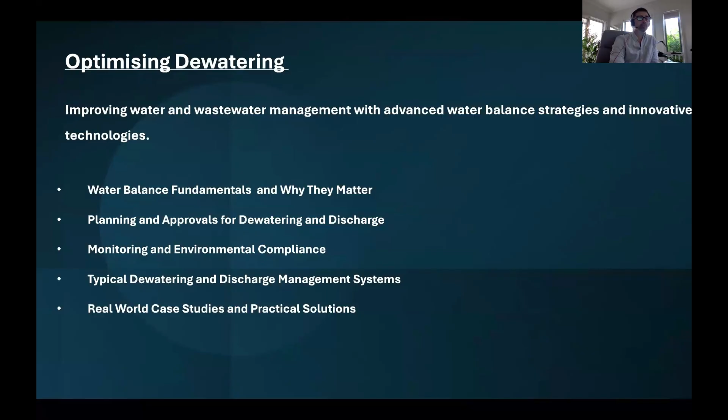So the concept of water balance has early roots, where major civilizations such as the Romans, Egyptians, Indus, and Chinese flourished by integrating water balance into their day-to-day lives. In each of these early civilizations, water balance management was essential for things like managing crops, providing drinking water, managing urban drainage, and mitigating flood risks.

Fast forward then a few thousand years to modern history, and things take a drastic change at the onset of the Industrial Revolution. At this time, there was a major gear shift in the demand for water as mass production required ever-increasing volumes for industries such as textile mills, iron and steel mills, steam power generation, and industrial-scale mining operations. To meet these escalating demands, engineers developed a wide range of invasive systems to store, transfer, and supply water, including high-capacity pump and pipe networks, extensive sewerage systems, and expansive reservoirs.

The shift from this limited-scale social use of water to consumption by mass production not only increased the stress on water resources, but resulted in widespread water pollution, which had profound impacts on aquatic ecosystems and human health. Rivers and streams that were once sources of drinking water and sustenance often became open sewers, with manufacturers discharging vast quantities of untreated waste directly into waterways where it mixed with equally copious amounts of raw public sewage.

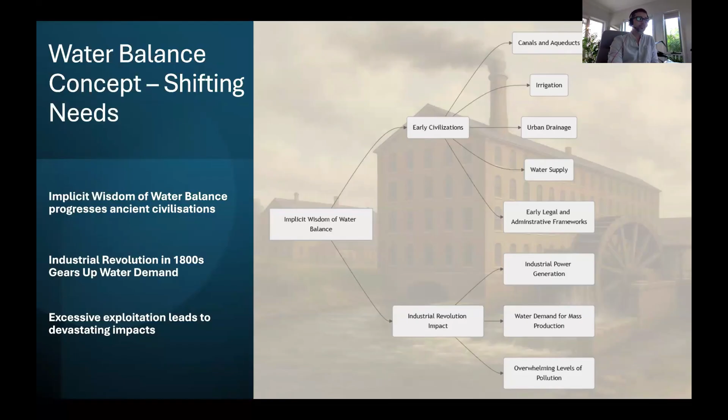By the 1980s, it was widely recognized in Australia that there was a need to protect water resources. The cumulative impacts of poor management practices, coupled with the harsh realities of Australia's variable climate, led to a series of economic and environmental crises. The crises forced a reassessment of how water was valued, managed, and allocated, which prompted a series of significant reforms aimed at recognizing environmentally and socially sustainable limits for water use and embracing the principles of water balance.

The Council of Australian Governments Water Reform Framework was a key turning point in how Australia managed its water resources. Some of the key principles enshrined in this reform were allocations of water to the environment, the establishment of water sharing agreements, and the separation of water property rights from land title. The COAG water reform also formally recognized the National Water Quality Management Strategy, or NWQMS, which today forms the basis for sustainable use of water, community values, water quality guidelines, and integrated planning for water resources.

It's important to note, although the reform was implemented at the national level, it was adopted by each state as a blueprint for a consistent approach to sustainable water management. Each state then drafted specific legislation and wielded the responsibility for sustainable management of their water resources through water access licenses, licensing take, and protecting water quality through pollution control and discharge licensing. In New South Wales, water sharing agreements and water access licenses are managed through the Water Management Act, and pollution control and discharge licensing are managed through the POEO Act.

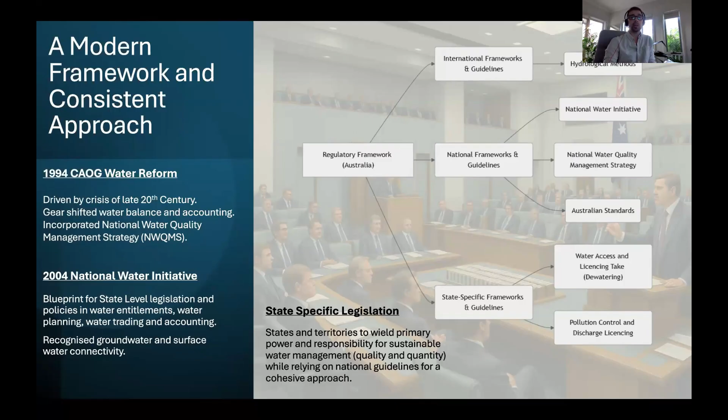So aside from important changes to legislation, there was further engineering and scientific effort needed to formalize methods for assessing, modeling, measuring, and monitoring water resources. Between 1965 and 1974, slightly preceding Australia's water reform, there was a global recognition and a formal effort to advance and standardize hydrological methods, which until then were varied and non-standard. Themes included recognizing the need for global data comparability, developing guidelines for measuring environmental parameters such as stream flow, groundwater, evaporation, rainfall, and water quality.

The IHD also saw widespread promotion of the concept of the hydrological cycle, which we'll all be familiar with from high school geography, and formal integration of the water balance equation into a range of hydrological methods. Now, since its integration and standardization, the water balance equation has formed the foundation of further advancements in water balance modeling into increasingly complex applications, where increasing numbers of complex variables must be accounted for.

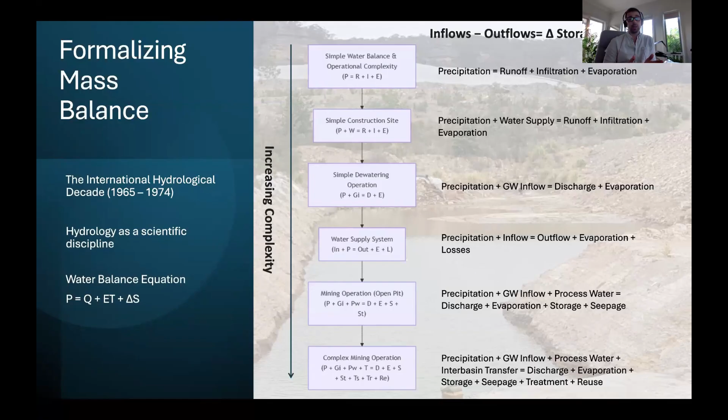So the starting point for any water balance is to prepare a conceptual model. This is, in essence, a simplified representation of a real-world system. At this stage, we're defining the system and its boundaries, the time period over which the water balance will be assessed. We're identifying the system components that relate to inflows, outflows, and storage, and describing the interactions between these components.

Once the components have been determined and compiled, the next step, typically adopted, is to prepare a visual representation in the form of a conceptual diagram. That might be a three-dimensional diagram, a cross-section, or it might even be a process flow diagram. For a mine site, this might be a diagram showing groundwater inflows, dewatering paths, discharge routes, storages, evaporation ponds. For a water treatment plant, this might comprise stormwater and groundwater inflows, wastewater inflows, storage, land application, and then discharge to the environment.

It's important at this stage, the conceptual stage, to identify any data gaps so that they can be addressed if needed through further investigations and data collection. For example, determining groundwater inflow rates might require some seepage monitoring or permeability testing of aquifers. For discharges, it might be necessary to collect further information on flow conditions and water quality in the receiving waterway. A lack of information in this regard can cause propagation of error down the line where you end up with the wrong results.

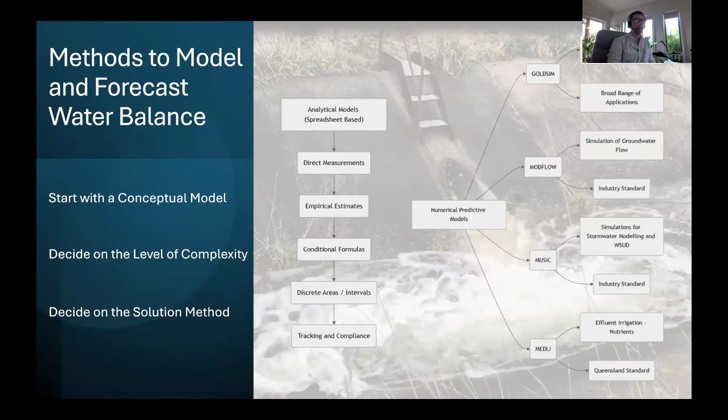It's typically up to professional discretion, but that being said, when it comes to the approvals pathway, the regulators will have a definition on what they require to gain approvals. So for mine sites, if you were to come in and say we built a GoldSim model, the regulator might turn around and say it's insufficient for X number of reasons, so we'd want you to go with the MODFLOW model. There are guidelines out there at the national level and some at state level on the methods to be adopted for groundwater modeling, and especially for groundwater models, there's the Australian guidelines on groundwater modeling. So that's what I'd refer to when considering your modeling approach, at least with MODFLOW. Okay, thanks for that.

Awesome. So there's an important adage in the field of hydrological modeling, which states that if you put garbage in, then you get garbage out. That's to say, if your model is based on inaccurate or incomplete data, you may find the outcome doesn't represent reality, and you're going to have to go back to the start when you realize that. So in order to build a reliable model, we must have reliable data on the necessary inputs for a water balance analysis. The first place to start on your journey is to gather data at your computer. So don't go charging out into the field. Compile the data you already have and what's available and reliable from the public domain.

The most common variables that I see for dewatering and discharge projects are climate data such as rainfall, evaporation and evapotranspiration, groundwater levels, aquifer hydraulic properties, stream flow data, water quality data, and your pumping rates. For more complex dewatering projects, you may require information on things like your process water demands, your water reuse volumes, your different surface land uses for land application schemes. Say, for example, you want to go and irrigate a field. What is the soil over there? What is the crop type? What are its crop efficiency and evapotranspiration rates? And does the soil have enough permeability for you to safely irrigate that area? Regardless of what you need, the place to start is at your desk. Build the conceptual model.

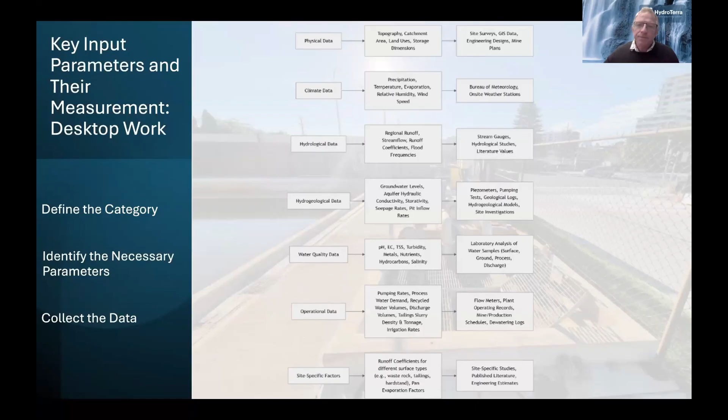Okay. Yeah. So once you've gathered your desktop data and you've built the foundation of your conceptual model, it might be time to start collecting the field data and fill in the critical data gaps that you found from your desktop study. And that might be only a few things. It might be a lot of things. In any case, you really need to understand what your data gaps are before you go out in the field.

Like the desktop data, you want to make sure that you're collecting and compiling information that's relevant to your specific application. So don't go out and test for everything. Go and target those objectives to what it is you're doing. You wouldn't, for example, go and collect field data on soil permeability if you weren't intending some sort of land application for managing water. Once you have a clear idea of what you need to collect, it's time to go and plan out a suitable strategy for collecting that data.

And there's a wide range of both standard and innovative methods which you can adopt when collecting field data relevant to water balance and dewatering discharge assessments. The method you adopt will depend on a combination of site-specific factors and the quality and type of information that you need. For example, you may want to determine the variability of flow in an ephemeral creek and the corresponding water quality during a rainfall flow event.

In this instance, standard methods might include the use of a weir coupled with a water level sensor and a rising stage sampler, or an automated water quality sonde. Some of the newer methods might include image-based velocimetry, or microwave Dopplers coupled with nutrient electrochemical sensors or passive samplers. Whatever you do, whenever collecting your field data, it's important to consistently consider the objectives and whether or not your field data collection is of sufficient quality and quantity to address those objectives.

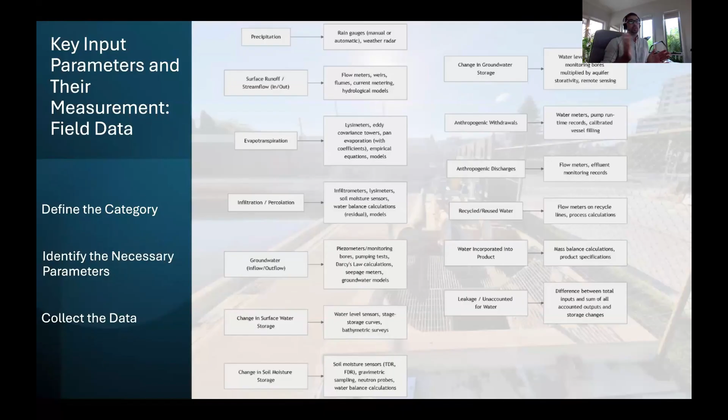Once you've got several of those examples of different unit hydrographs for different magnitude of flow events, and you've coupled it with your water quality, you can get a better idea of the natural flow variability before you commence a project. But it's a cost, and it's a highly technical thing. So I would say that is something that, when it's done right, it can really help you out. But few times it's done to that level of detail that's needed.

We often get involved monitoring groundwater surface water interaction projects. It's a tricky area to predict, isn't it? So just sort of, is that something that you look at on every project? Is that part of your conceptual model, or?

So the variability or the unpredictability, is that right? That's right. So I don't know, say it's the Yarra River in Melbourne and its connection to the CityLink tunnel during its early phase of work. Is that something that you would expect to need to do? Yep, logically absolutely. It's part of the uncertainty analysis, and it's part of that uncertainty assessment. And the best we can do with that is come up with statistical derivations to give best fits on what we expect average and reasonable worst case conditions or best case conditions might be.

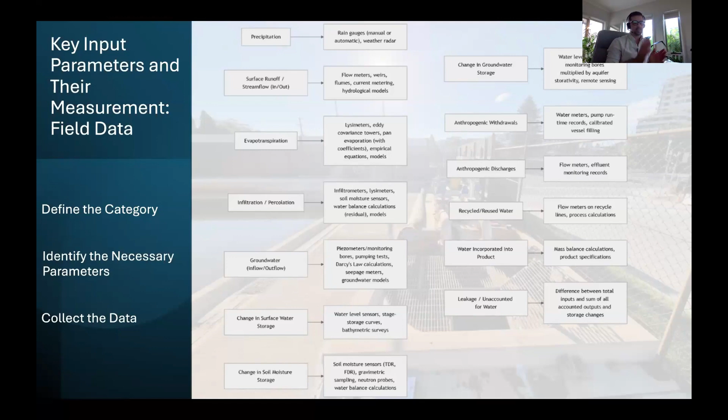So we take a sample and we say, this is our sample. We'll run the statistics on that and hope that it's representative of the population. So that's the best we can do. We're always getting snippets of information in environmental monitoring. It's very rare that we have comprehensive continuous data that's reliable and can be used universally. And part of that is, I think, it comes at a cumulative level where a project starts and ends and they collect data for a short period of time and then it just disappears into the ether.

My personal view, and I think a lot of people hold this view, is that if all that data that people are out capturing and collecting on these systems was collected and centralized into an open source area, I think there'd be a lot of benefits and a lot of advancements in environmental management. But unfortunately, a lot of that is locked behind private and confidential or locked doors. Yeah, and I think it always will be. I don't think it's ever going to change. I don't think it can change, unfortunately, but you can always dream.

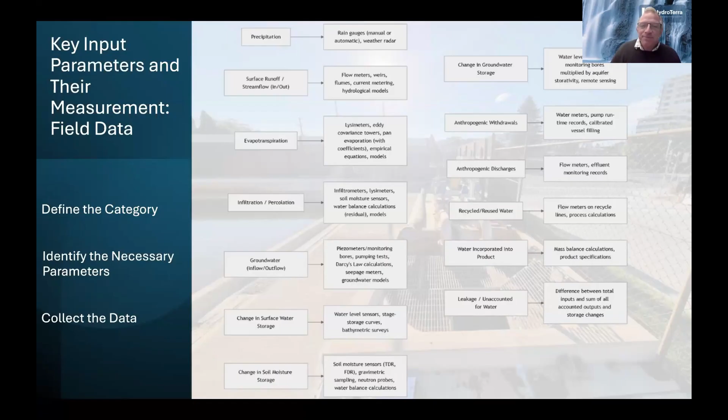Yeah. Let's move to the next one. Grant, so now we've talked a bit about the technical. It's time to talk a bit more about non-technical, but that is planning, approvals, and compliance. And it's important to note here that not all projects will follow the same process or require the same level of detail. Small-scale, low-impact projects may only require a few of these steps, whereas a large-scale project may require all of them to a great deal of detail. What I'll talk about here is what can be expected for some of the larger projects, and to give you an idea of broad considerations in the approach for planning, approvals, and compliance process.

To start with, it's important to consider the application of the water balance, as I've discussed already. It's often not a one-time exercise, but rather an evolving process and a tool that will provide critical insights through the entire life cycle of a project, from its initial conception through to the end of its operation. For dewatering discharge projects, the process typically starts with identifying the need for discharge, conducting initial site investigations, characterizations, and risk assessments, which are then fed into a water management plan. This might be a single plan or a master plan with a series of sub-plans governing the sources, transfers, storages, uses, and discharge of water.

The impact assessments and the management plans are then submitted to a regulatory authority and stakeholders to obtain approvals and licensing necessary for the project to progress. So for a dewatering project, it may be necessary to obtain water access licenses and works approvals to take the water. Or for stressed catchments, there may be a need to acquire water access through trading markets to effectively buy an allocation from another access license holder, as none are currently available and the system is over capacity. To then discharge that water, it might be necessary to engage further with a different regulatory authority and stakeholders again to obtain a permit to discharge or a discharge license.

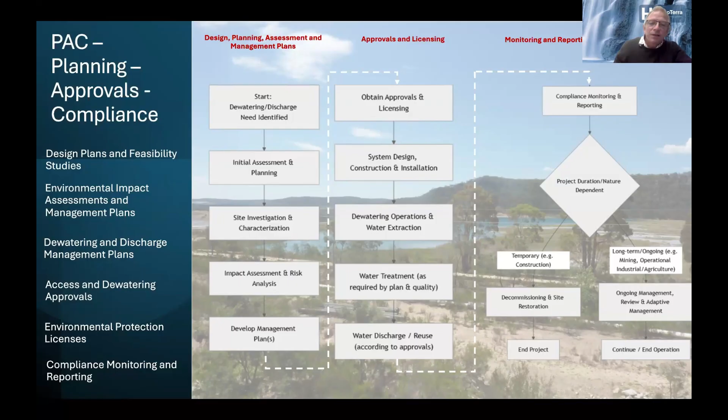So looking at management plans in further detail, there are a few common documents or components that we would consider in a dewatering and discharge scheme. The first and most obvious is deciding on your dewatering method and design, which I'll talk to a little bit later on. You may decide, for example, that a sump pump is sufficient for the base of an excavation because the footprint or the depth is quite small and the formation is relatively well consolidated, so there's no risk of

it slumping in. For larger projects or high permeability units, it might be more beneficial for you to dewater the local extent prior to and during excavation using abstraction dewatering bores, or adopt an exclusionary method such as a cut-off wall or a cofferdam. Once you've decided on your approach, you can actually start working on the other components, including deciding on your monitoring program, your surface and groundwater investigations and monitoring, and a discharge and reuse plan and a water treatment strategy, because you'll have a better handle on how you're actually going to manage the water. And then these can all be integrated into an overarching environmental management plan, or more often than not, a sub-plan, which is your water management plan.

From your experience, like we had Greg Hoxley on the other day, did a webinar, and he mentioned that the level of rigor required for the groundwater side of things before getting approvals is going up. Does that concur with yourself? You're finding they're needing more and more rigor, or? Oh my God, they've always needed a great deal of rigor. And I would say they're getting more scrutiny now than anything else. I've seen it a lot with licensing of discharges, and I've also seen it with taking of water for dewatering.

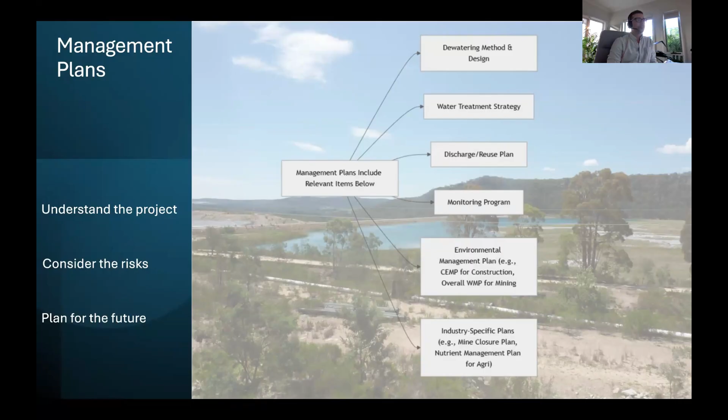Part of that is born out of the evolving guidelines and understanding of groundwater systems, and part of that has arisen out of learning from mistakes made or bad practices. Identifying the need for stricter rules around the approach, and even just consistency around the approach. One of the most infuriating things as a consultant is when there's a lack of a guideline and people are doing all sorts of things in different ways that can cause risk. Makes sense.

So moving on from management plans and onto the fun world of approval and licensing. Once you've got a draft of your environmental management plan, it's time to submit that to the regulatory authorities and ideally cross your fingers and hope you've done all your homework, because they will know if you haven't. They'll review your documentation, check if it's all in order, and provide you with the relevant permits to proceed. And it's not always a matter of once and done with this process. You may find out that they've got some hang-ups that you need to address, and you have to go back to the drawing board with your water management strategy.

For access and take, your water management catchment, for example, might not have sufficient available volume for you to extract water, and you might have to consider something like a managed aquifer recharge scheme or a closed loop system for your dewatering project so as to not impact on that aquifer. Or you might have to go to market and buy some allocations and hope that there are enough available for your scheme to go ahead. For discharges to receiving waterways, you might find that the EPA are not comfortable with the level of risk to the environment caused by the release of your water.

And you may need to further explore your water management options, such as irrigation schemes, transferring that water to other users who could use that water, even at its level of quality, or a trade waste agreement for discharge to sewer. And it's important to note here, for discharges to sewer especially, that many of the public water treatment plants in Australia are either at or over capacity under their normal operating conditions, especially so in the regions. So discharges to sewer generally have limited success unless the volume is very low. And even then, there are water quality limits around discharge to sewer, which you might not be able to achieve for your site.

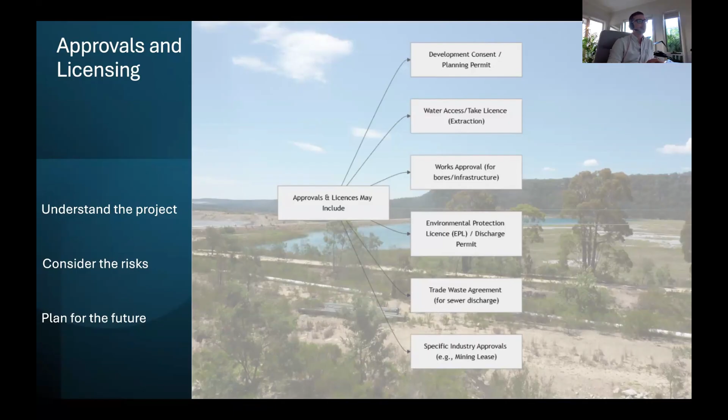So once you've got your permit, fingers crossed, and everything's kind of going your way, you'll need to expand on your environmental monitoring program. It's often a condition of these licenses that you have a robust monitoring program in place, and then you continue to monitor. You might be required to monitor and report, for example, on your abstraction rates for compliance with the water access license.

You might be required to monitor and report on water levels and drawdown, not only to assess potential impacts to aquifers under the aquifer interference policy in New South Wales, but for potential risks from subsidence, which is a particular concern for dewatering projects in urban areas where subsidence could cause major issues to the foundations of buildings and linear infrastructure.

So water quality monitoring at your licensed discharge point will be used to inform the EPA on your compliance with your discharge limits, and they may choose to set a volume limit to balance your potential risk to the environment, which would require you as well to conduct flow monitoring.

It's important that your monitoring methods are undertaken in accordance with the approved methods, not something you've made up yourself, as a failure to do so could result in a non-compliance and penalties, and the penalties are often quite steep. You could be looking at $60,000 for something you could have invested in and maybe spent $5,000. So if you skimp, you can sometimes get punished for it.

Typically, I would say you're required to adopt at least the Australian standards, but state level guidelines and standards might also be required. For example, the New South Wales EPA have their own approved methods for the sampling and analysis of water pollutants in New South Wales.

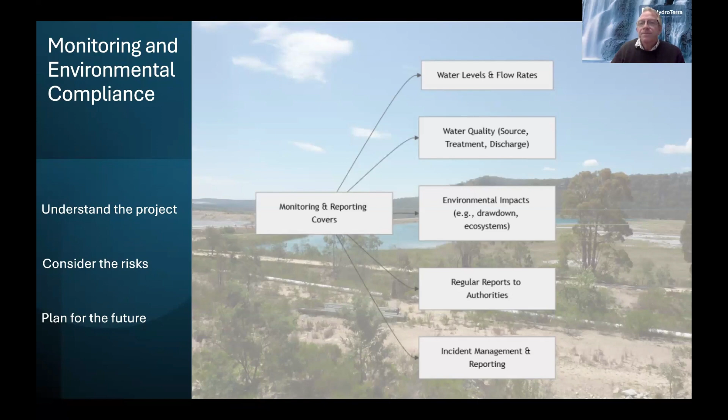All right, shall I move to the next slide? Awesome. So now we've rounded off our discussion on planning and approvals and compliance. We'll take a shallow dive into dewatering and wastewater management techniques.

It's important to note that any effective dewatering and discharge management system is a combination of both critical engineering decisions and critical management decisions, which need to be drawn out through collaborative discussions between management and engineering. In my experience, systems will often fail to meet their objectives when there's limited dialogue between the operational and the environmental managers, and where the engineers in charge of the design haven't had a chance to liaise with either of those parties and come up with suitable methods to risk out key risks.

So managers, for example, might require that processed water streams are treated and recycled through a processed water system rather than being discharged. The engineers can then respond with the necessary engineering methods, such as bringing in a water treatment plant. In the converse, an engineering team might require dewatering at a certain rate to facilitate the excavation of a pit, and the management and environmental teams will be required to determine appropriate solutions for the reuse and disposal of that water in accordance with your license conditions or your environmental management plan.

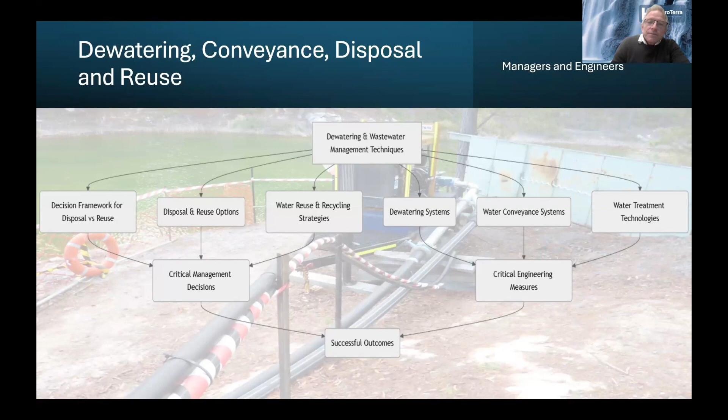The test, though, the ultimate test, I think, in New South Wales anyway, is you refer to the aquifer interference policy and go from there.

Cool. Well, look, first case study. This one is very close to my heart because I've been involved in all of the tunneling packages in some way as a water quality consultant. It's the Sydney Metro West tunneling packages. The Sydney Metro West is an ongoing project which involves construction of 24 kilometres of twin tunnels, creating a new underground railway to double the rail capacity between Greater Parramatta and the Sydney Central Business District.

Tunneling work for Sydney Metro is divided into three principal packages: the Western Tunneling Package, the Central Tunneling Package, and the Eastern Tunneling Package, each of which has been awarded to a specialised joint venture or a consortium. Each package contractor has had specific responsibilities for implementing water management measures within their designated section of the alignment.

The management of water resources during the construction of the Sydney Metro West tunneling packages is governed by a comprehensive and overarching framework of environmental approvals, project-wide standards, and contractor-specific plans. This framework ensures that the potential impacts on water quality and water resources are systematically addressed, mitigated, and monitored throughout the project in a consistent manner, despite there being three separate contractors working on three separate sections.

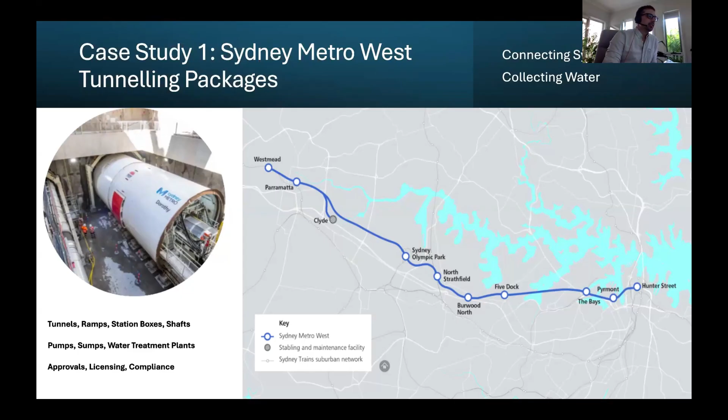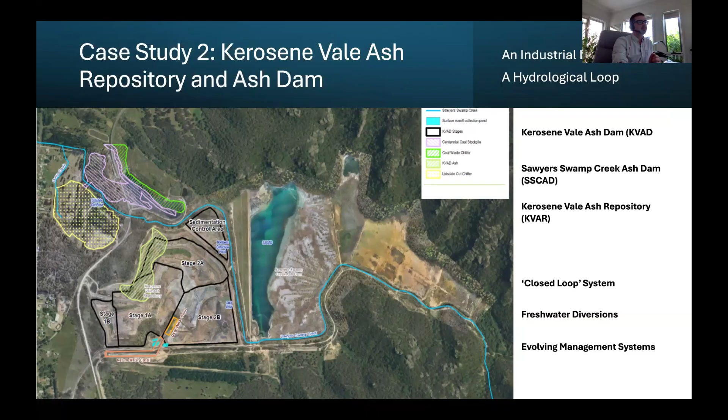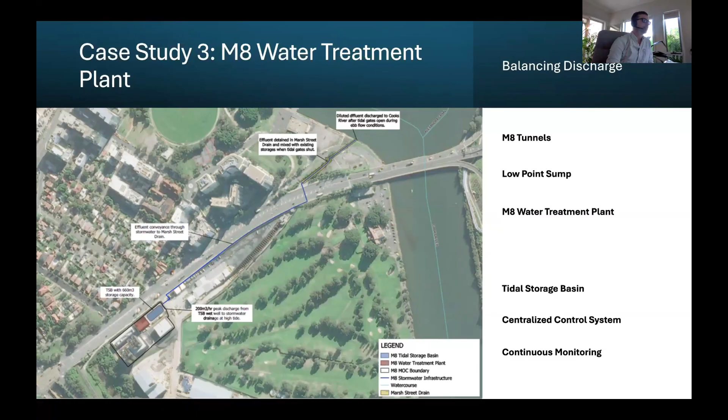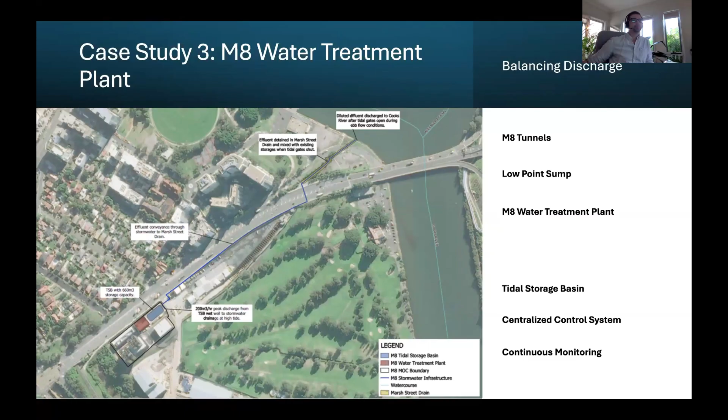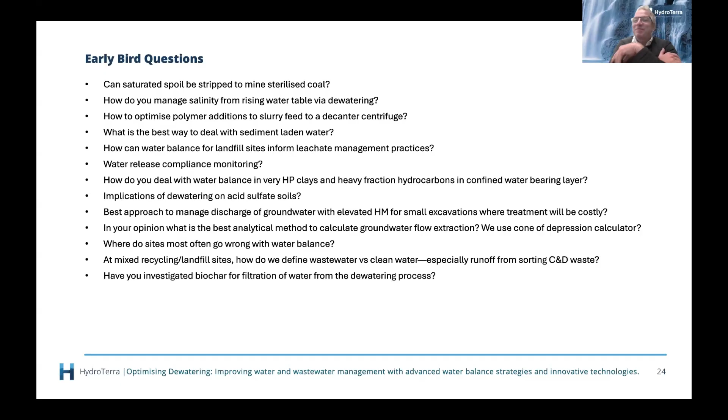Have you investigated biochar for filtration of water from the dewatering process? Look, I haven't personally. I understand that it has been investigated through a number of research papers. My experience has been that the go-to at the moment is granular activated carbon, and I think the reason for that is because GAC offers higher porosity and a higher capacity to adsorb contaminants. It is potentially in a lot of instances higher cost, but there's better control on the quality of that GAC, leading to more consistent outcomes.

All right, we're on to the Q&A questions. Happy to keep going, Dave. This is excellent. Sure. Hez Murray's got a question.

There seems to be a preference in the international community towards FEFLOW over MODFLOW, while Australia seems more MODFLOW orientated. Any thoughts or comments on this with regard to mine water balances, with dewatering being the primary component? I would say that answer comes down to what is relevant and what is considered standard best practice at a national level and at a state level.

So while some people might decide they're going to adopt FEFLOW and that it's a better model, in the grand scheme of things, what really matters is what the state regulatory authorities and the national regulatory authorities, if that's relevant, will accept. They both have their pros and cons, their benefits and limitations, but what matters is compliance with standards.